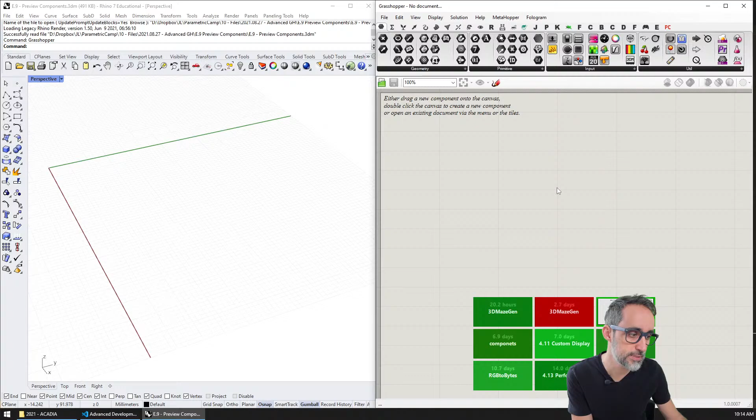Describe the data structure in Grasshopper, how to output data trees, and then for that, replicate an example. Which example could we replicate? Let me fire up Rhino, preview components. I wonder which of the ones we have, a grid of points. Could that be interesting? Do we have a grid of points? Utility components, vector components, construct vector, point grid. Okay, yes. So this one, because we use data trees here.

And then we use that, and then NURBS, divide the surface. This maybe is a little too long. Data components we can get. So we can do how to output data trees with an example of a point grid, and how to input them, with an example of, maybe, tree info. I'll take a look at that.

I think that's pretty straightforward. I'm not sure that we need to do examples or a video here. It's not really that difficult or that different. Okay, custom previews. So let's start with that. Mass addition is going to be in arithmetic, or numerical sequences, or utility components. I think we're going to do that in utility components.

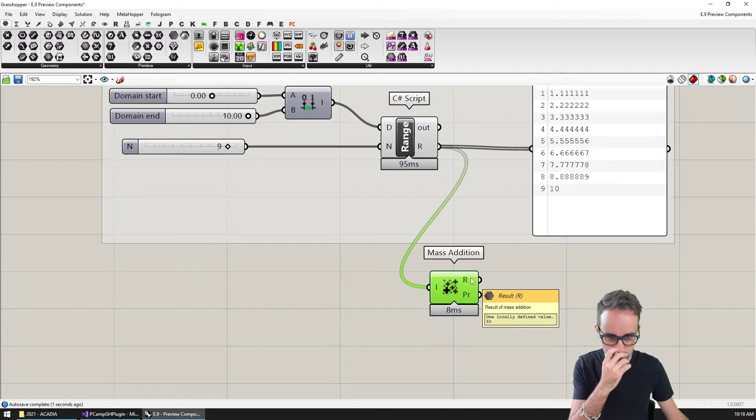So maybe I can talk about mass addition, the partial results here. Alrighty. Mass addition. What was the last video that we did? Icons and our first components. Okay. All right. So let me start here then.

Hello, this is Jose Luis here at ParametricCamp, and welcome to another video in this series, Advanced Development in Grasshopper, where we're going to take a closer look at how to manage data structures when we are developing native plugins for the Grasshopper environment.

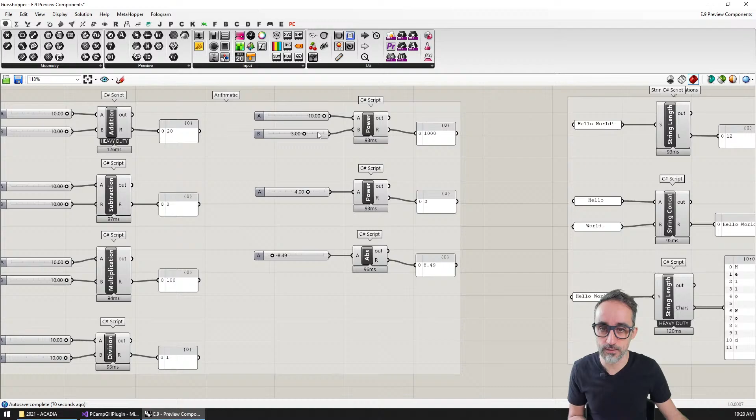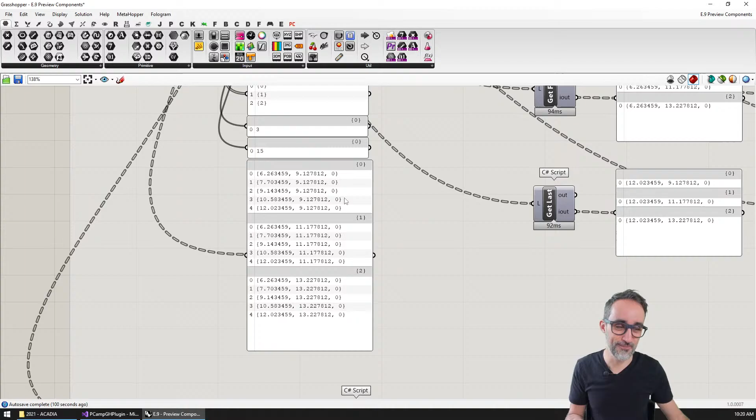And what do I mean by data structure? So if you are familiar with the Grasshopper environment, you may already know that we can work with individual points of data, like for example, adding two numbers and getting another number as a result. But we can also create sequences of numbers that are stored in data structures that are referred to typically as lists. But Grasshopper, on top of that, has a particular data structure that is called the data tree, which is basically a combination of multiple lists that have a certain order and a certain structure within a larger superstructure, if you will. We've talked about this structure previously in previous videos.

And we've also seen in previous videos how to do lists and how to create data trees inside of Grasshopper using C# scripting. In this video, and I'm actually going to point to a card that will be popping here somewhere in the corner, and it will be in the description of this video where you can find more information about that.

What I would like to cover in this video is how to, in native development, work with lists of data as inputs and as outputs, and at the same time how to handle data trees natively in Grasshopper in development, because when we develop native plugins, data tree structures are slightly different. Okay, so examples of this are, for example, if I take a list of numbers and I input that list of numbers, then I can take the whole list and make operations that look at the full list altogether.

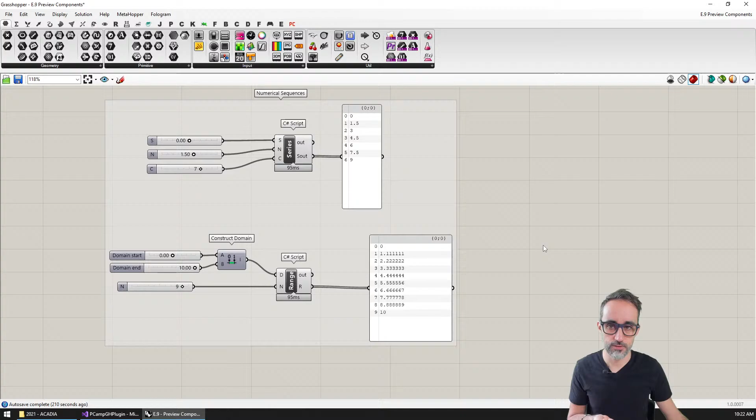And I'm not liking where this is going. I think I'm going to start over again. I was not liking that. So I think I went too much into what data lists are and data trees are. And that was unnecessary, because if someone is watching this video, it's already from the playlist and they already know what lists and data trees are. Okay. And maybe I don't need to explain. Maybe I don't need to get much into this. All right. Okay, let's try again.

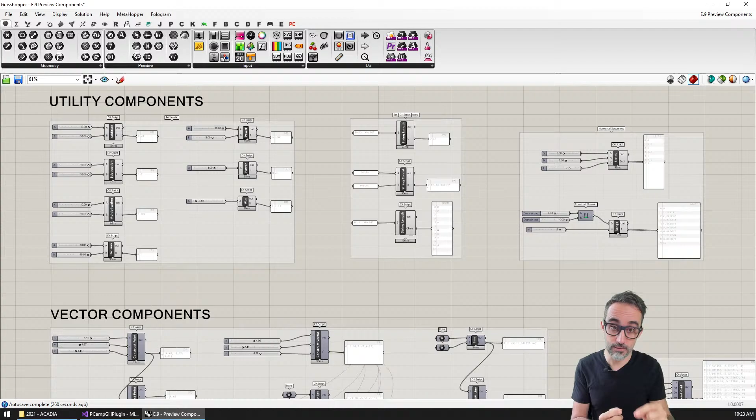Because as you already know from previous videos, Grasshopper allows you to work with individual points of data. So for example, you can right click here and say I want item access, so one element at a time, or you can work with lists as an input so that you can take a look at the full list of elements that are coming in.

But also, as you already know as well, Grasshopper has this particular data structure called data trees, which is basically a collection of lists within other lists and with some additional metadata such as the name of the branch that those lists are contained in. This is very handy for many operations, and we have seen in previous videos how to, using C# scripting, work with lists and with data trees.

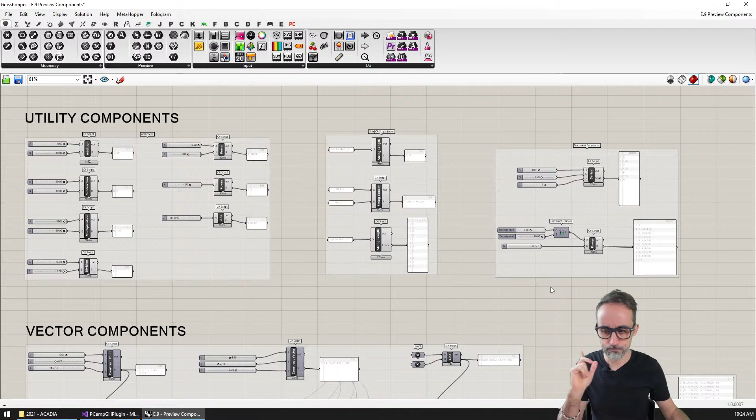So in this video, I would like to take a look at how to handle lists and how to handle data trees, especially because data trees are a little different than what they are when we do C# scripting. Okay, so for example, in the previous examples, like when we were developing the divide curve component, you could see that in order to output, instead of one item at a time, a list of items, it was just as simple as changing the access parameter of the outputs that we had here. All right, it was just as simple as that.

And then keeping in mind that the only thing that we need to change in our solve instance is that in the DA element, so in the data access element, instead of using the SetData method, use SetDataList for the output. Okay, so what we're going to do in this video is we're going to take a look at how to take a list of data as an input, and then we're going to do an example of that, and we're going to move on to data trees.

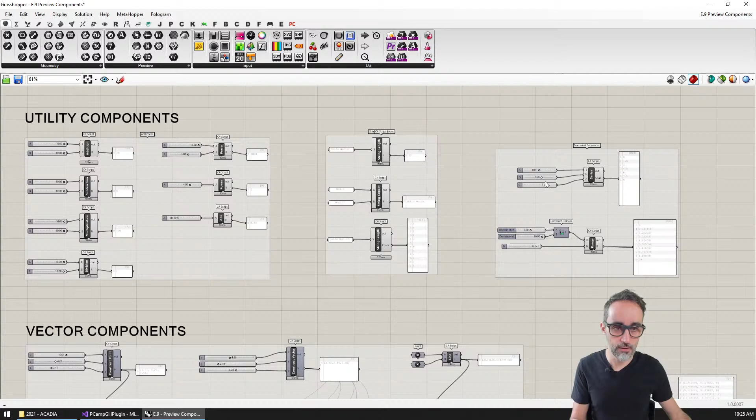So let me show you an example of how to take lists as an input and work with those. I think what we're going to do is an example where we're going to replicate the mass addition component. The mass addition component is a component that takes a list of numbers and then adds them all together, creating the result of all the numbers together. And then it also gives you partial results of those additions. Okay? So let's take a look. Let's write the basics of a mass addition component natively.

Okay, and then what we're going to do now is, how am I doing battery-wise? So what we're going to do now is, okay, mass addition.

As we've done before, I'm going to go to utility components and add a new item that is going to be a subset of the template empty grasshopper, and I'm going to call this mass addition component. The nickname is going to be mass add, the name is mass addition without the component, and the description adds a list of numbers. The category is going to be utilities, correct? No, the category was PCamp and the subcategory was utilities.

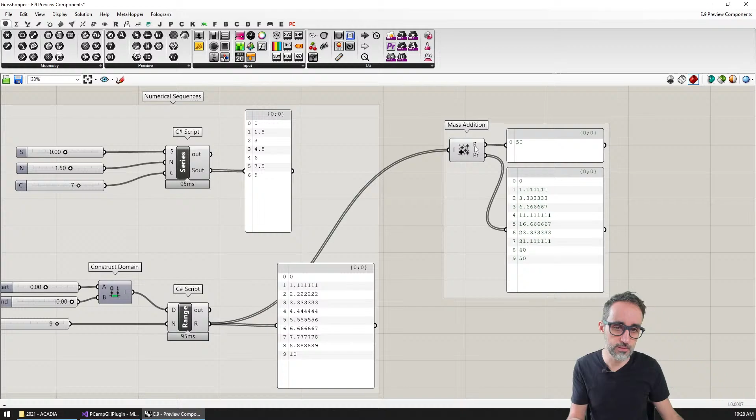And then the two outputs are going to be R, the result, and PR, the partial results. So I'm going to say P manager add number parameter, R, the result, with result as the description, and this is going to be an item, because from a list, when we add them all together, we just get one single number.

Then I'm going to copy and paste this, and say PR, partial, with partial results as the description. And this one, instead of an item, is going to be a list, because I'm going to have a list of numbers representing those partial results.

So managing input lists is just as simple as changing the access parameter, but remember, when we use this pattern where we predefine the variables that contain the input data and fetch it from the data access object, instead of being a curve or an integer, it will have to be a list of all those values. So here I'm going to define a list of doubles that I'm going to call values, and initialize to null, for example.

And then I would like to say if I did not get a data list, in this case we do not use get data, we use get data list. If I could not get data list in parameter 0 and pass it to values, then return. And I think the error I'm getting here is that I don't need the ref keyword because this is not a primitive value anymore; this is a list, which is a reference value. And that's it for taking the inputs.

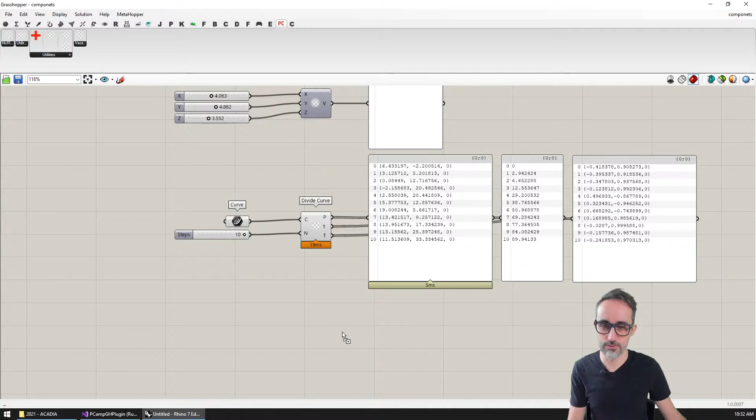And I am going to open Grasshopper, and I guess it was the components that I had. Yes, I had components here, and in PC I had utilities, and oh, it's not showing up. Why is it not showing up? Oh, I think I have the name wrong, for some reason. So, but let me just say mass addition. So for example, let me plug in here the series, all right?

And then you can see that value cannot be null. What is going on? Parameter list is a null reference. Get data list can only be called with a constructed list T. Interesting. It looks like maybe by doing null, it's not working. I cannot assign a list to a non-initialized list. I didn't know that, or I didn't remember. Utilities. Okay, so that was the typo of utilities.

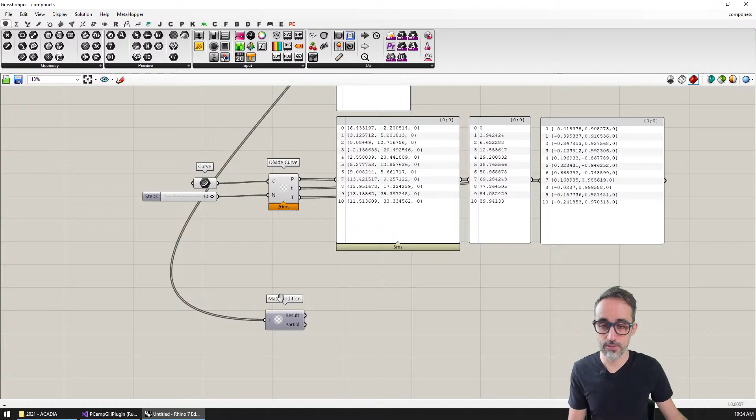So maybe then let me just initialize this to a new list that is empty, and let's see if that solves the problem. I'm going to initialize this. I'm going to open Grasshopper again, and then I'm going to open components, and then you can see that now this works. So as this is working right now, I'm going to copy partial here, and you can see the partial results, and then you can see the full result is here. So that would be 67.5, and this is the result.

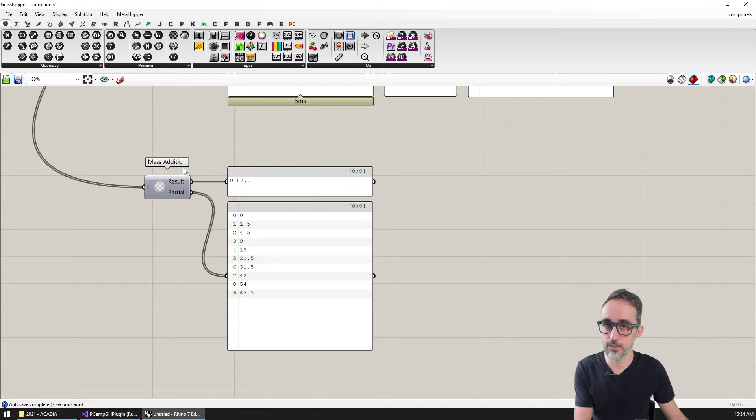And let me compare that with mass addition, and let's see if that is the same. So I'm going to plug that in here, and the result is 67.5, and the partial results look also the same. Okay, so it looks like we're good. And now utilities, add numbers, mass addition. So this is here. All right, so this is looking great so far. Beautiful.

So I think this is already good. So data lists, we know how to output data lists, and we know how to input data lists as well. It's just a matter of making sure that the inputs and the outputs have the right parameter access, and that we are working with native C# lists. We don't really have to do anything around this. So now let's take a look at how would we work with data trees instead of simple lists inside of native Grasshopper components.

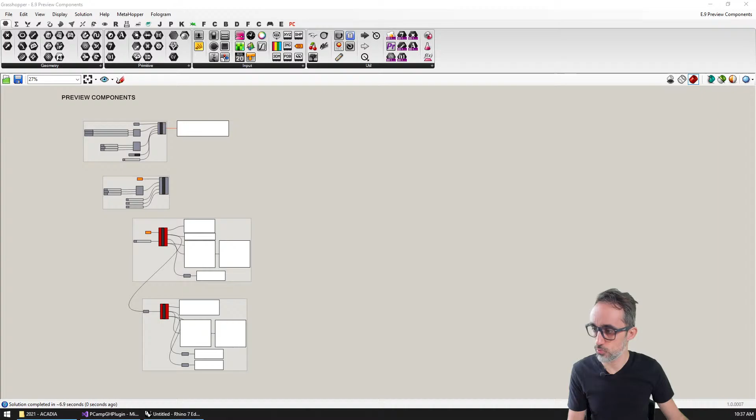Oh, this is breaking. Not good. Rhino just crashed on me. Okay, so let's try again. Okay, we're good now. And I would like to take a look at the point grids.

Point grid here. I'm going to keep that, and perhaps this is something that we could start the video with. So I'm going to take a look at point grid, and I'm going to say, remember, in C# script we have data trees.

I don't really know why we don't have that in the Grasshopper SDK. Let me double check, because I've always done it in a different way, but maybe I am being dumb. So do we have data tree? Data tree constructor. The data tree class implements basic Grasshopper data in an easy to use class. It's used primarily in a scripting component. If you're using the SDK, you should consider otherwise.

All right, so I guess this is. So I guess I was doing it right. So I was not using data trees. Which actually, it's a pretty good point to bring up as I'm talking through this problem. Exactly, I know, Victor. That's what I would like. I'm gonna make a video about that, I think.

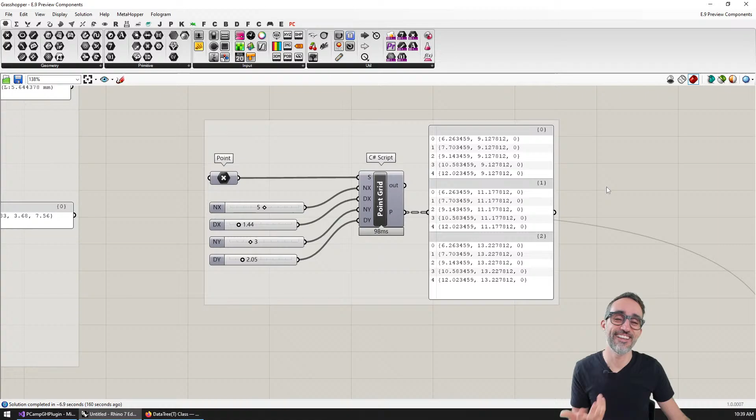If you remember from our previous videos, data tree structures are this particular structure for data that Grasshopper has, whereby you can have a structure that contains multiple lists in an ordered way, with additional metadata in the form of branches giving basically names to each one of the lists. We have previous videos for that, so we're not going to get into that again.

But if you remember, the way we did this when we were doing C# scripting is by using the class called the data tree, that allowed you to specify the type of data the data tree was going to be holding. It had specific methods for adding data to particular paths or branches. So this method using the data tree class is very similar to what we're going to do inside of native Grasshopper components.

But we're not going to be using data tree, because the data tree class was actually designed primarily for scripting components. If you look at the Grasshopper documentation, the SDK, it implements basic Grasshopper data tree functionality, easy to use, mostly for scripting components. But if you're using the Grasshopper SDK, which is writing native plugins, you should consider instead using the GH structure class. If you go to the GH structure, it's basically the same thing, just with many more methods and much more functionality.

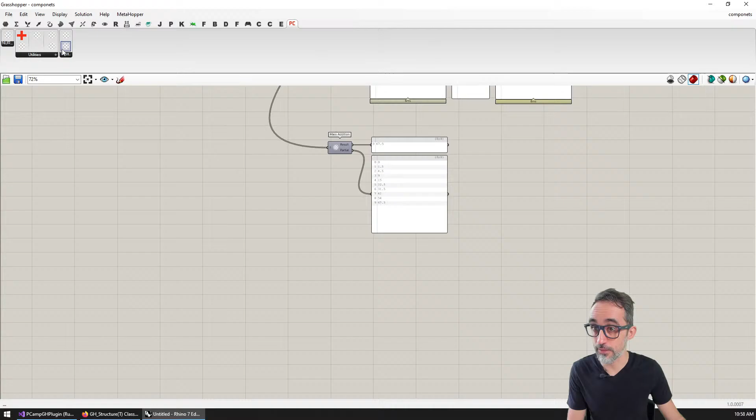Okay, my Grasshopper went to the other screen, and now under vectors I have the point grid. Let me open the other file—I'm just going to copy literally the data from the other component.

Oh, and it crashed. I've been having this problem before where when I'm developing, I can't really open other files. That's kind of sad. So let's just replicate it manually. Give me a second.

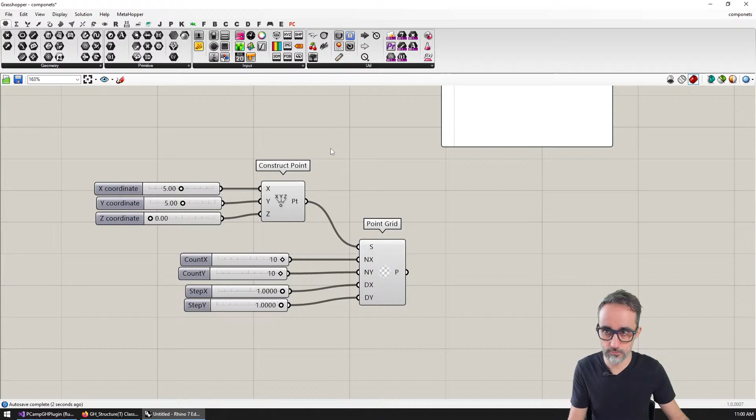Okay, so here I'm going to construct a point, and this is going to be... I'm going to do this, and then this, and then this, and then 0, this 5, and this is going to be 0. That's going to be the starting point, and the amount of elements in one direction is going to be 10, the amount in the other direction is going to be 10, and the gap size is going to be something, for example here and here. And I'm going to turn this off, and turn this off again.

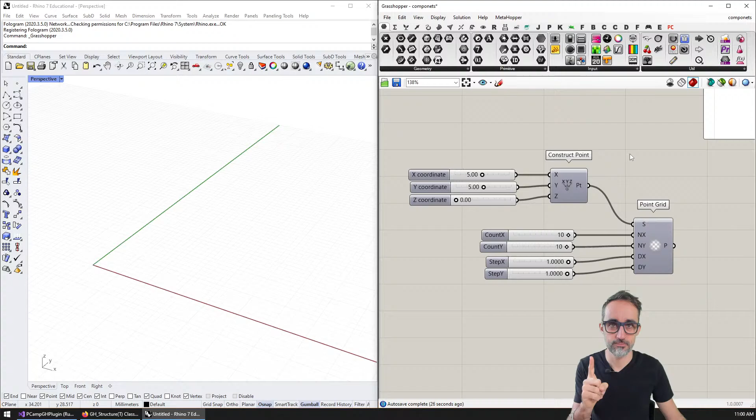Beautiful, so here we are. This is the point grid component we just developed. I plugged in a point, and I plugged in a bunch of numbers to control how many elements in one direction or the other. It looks like, if I turn the pre-visualization on, this is working. I can control the direction and the gap in each one of the directions.

But most importantly, is this a data tree? Beautifully, what you can see is that what I'm getting out of this component now is this list of lists, where for example I have 10 lists of 2 points each, structured as a data tree with different branches, etc. Okay, beautiful, that was it. So this is basically all you need to know about working with data trees inside of native components. You can create empty data trees like this.

You have to make sure that you wrap the data inside of proper Grasshopper types, and you just have to output it with the SetDataTree method, and make sure that the output has the correct parameter access as the tree.

Okay, and similarly, if we wanted to work with data trees that come into the component, it would be very similar. So let's take a look at a quick example of how to do that.

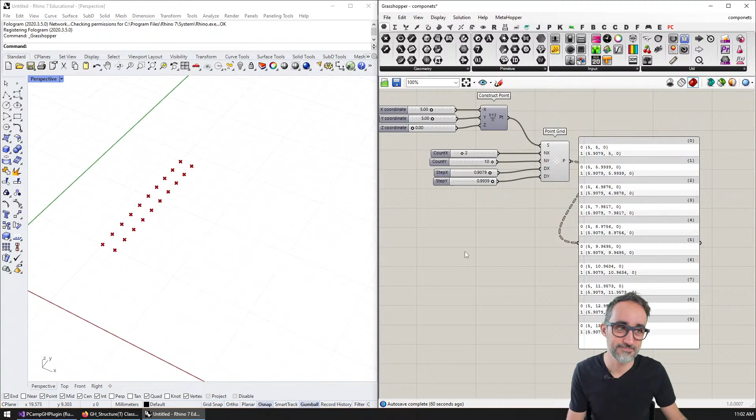I'm going to do that offline. If this doesn't crash, which it did. Okay.

And... I'm going to do it offline. Ooh, you don't wrap them, Victor. You just use objects.

Or you create your own custom IGH_Goo - you create your own sub-extensions of the Grasshopper data types using the IGH_Goo interface and wrapping your own data. You do that here, with IGH_Goo.

So, this interface - no wait, this interface - so you create a data type of your own. So for example, Grasshopper_MyDataType, and that data type must implement the interface IGH_Goo.

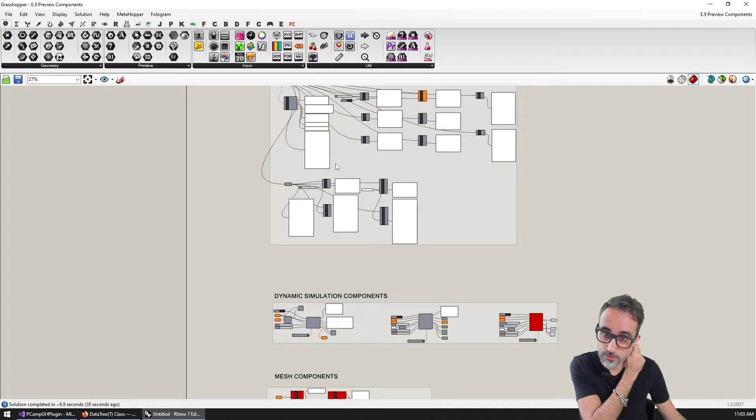And data tree - where were we? Preview. I was going to do this one, the tree info. So I'm going to copy this, and I wonder if we have access to all that information. So let me try that.

I'm going to do this offline, data components. I'm going to create here - I'm going to add a folder and I'm going to call it DataComps, tree info component, and I'm going to add a new one that is going to be TreeInfoComponent.

So we may actually want to make a video about that, Victor. That's a good point. I'm going to write this here somewhere - to do: implementing our own data types using IGH_Goo, I guess. That's advanced actually. I wonder if we can do that when we do external libraries.

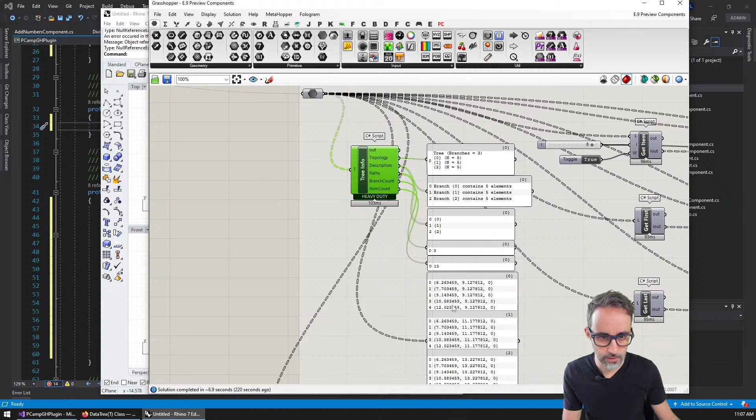Alright, so pManager, I'm going to add a string - AddTextParameter. That's going to be topology, and it's going to be top, for example tree topology, and then data access Tree.

Okay, so what else? We have description - pManager AddTextParameter, then description, that's going to be the description. This is what's bad about - oh, this is not tree, sorry, this is just an item actually. And description is going to be the type.

This is what's bad about developing Grasshopper - it's just very tedious, you have to write a lot. If you want to do a good job documenting everything, having text, highlights, all this stuff, it's kind of a lot.

So pManager dot - I wonder, are there AddPathParameters? Add a data path parameter to the output list, yes. So that's going to be paths, that's going to be p, paths, and then Grasshopper - this is going to be a list.

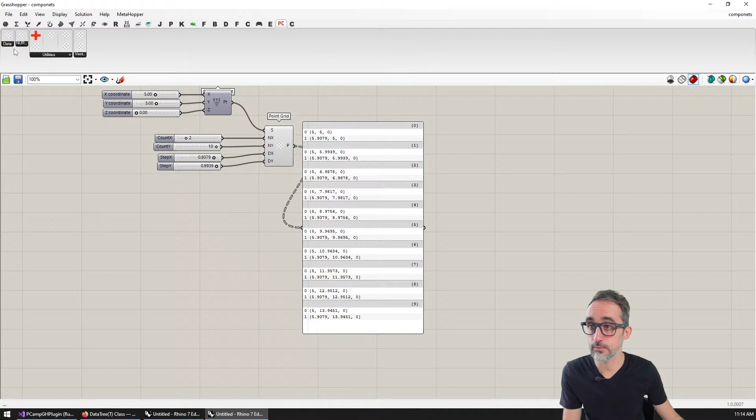And let's see if this works at all. So I'm going to... oh no, that's not what I wanted to do. That's not what I wanted to do. Okay, sorry. Maybe it's just that one file that doesn't load while we are on development mode for some reason. Components, all right, and then here we have Tree info, topology, empty data, what? Branch count 0. Why is this not working? Uh-oh. All right, folks, something is wrong. Topology, empty data.

I wonder what is going on. Am I not? Oh, I am not loading. All right, I did not load. That was very smart. Look at what happened. I just didn't load: if da.GetData from 0 and put it inside of t, then return. I was just not loading the data. And I got an error. This has to be okay. All right. Very smart, Jose. Very smart.

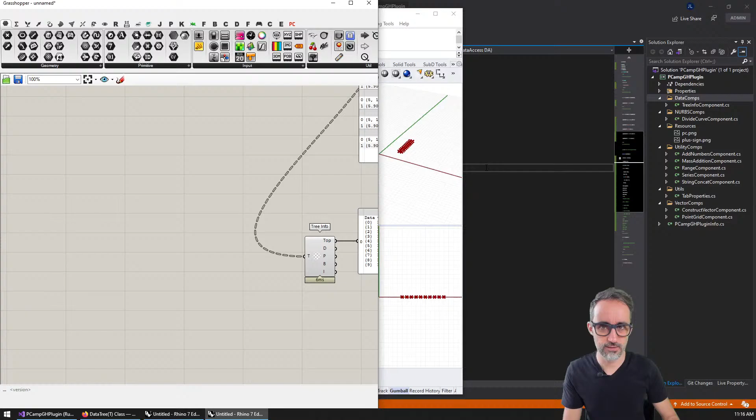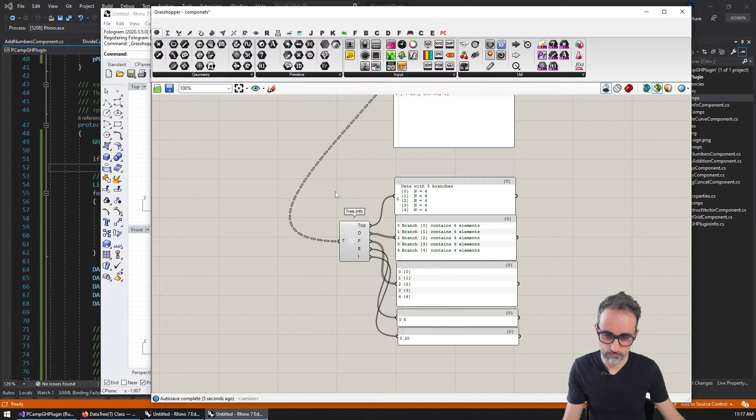Yeah, and why are the tabs not... Oh, okay. Description. Okay, four elements. Okay, so I'm going to show this and this, and the paths are blah blah blah, and then branches and the amount of items. Okay, beautiful. So I think I'm ready to explain this.

You can set build events so you don't have to load Rhino and Grasshopper every time using Grasshopper reload assemblies. How does that work? Grasshopper reload assemblies. I don't have Grasshopper reload assemblies. I think they discontinued that; that was available in Rhino 5 or Rhino 6 or something, but I think they stopped that in Rhino 7 because it was just too messy. Is that what you're talking about, Carl? I used to do that, but I think they discontinued that. Okay.

All right. So I'm going to take this here. I'm going to show the example of... I didn't start doing anything before, right? No, I didn't. It's still in there? Where is it? Grasshopper. Damn it, Grasshopper. Grasshopper. Reload assemblies.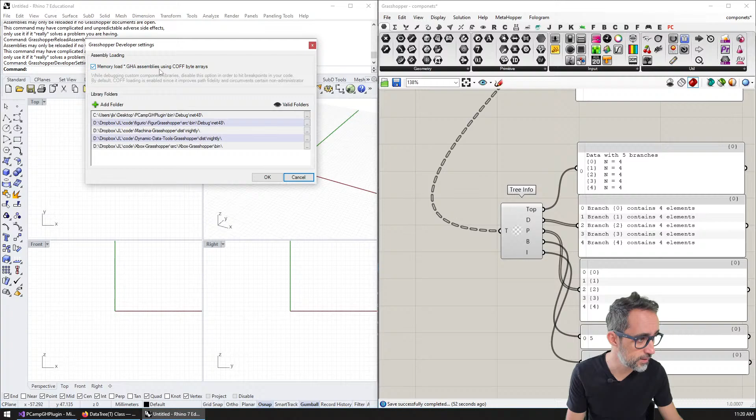So Grasshopper reload assemblies. It's really reloaded, and then I reload it, and I recompute it and it's not happening. Load Grasshopper developer settings, then ensure you've checked memory load. Grasshopper developer settings, I do have memory load. It won't autocomplete, just a shortcut, something like that. I can have a Grasshopper file open. Okay.

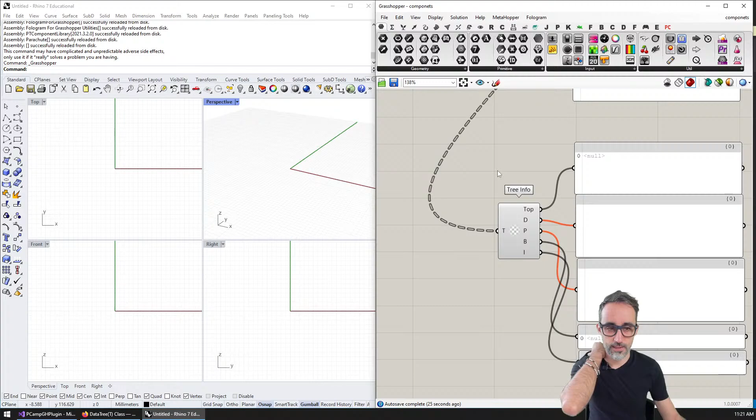I'm going to save this. I'm going to close Grasshopper. I'm going to Grasshopper developer settings, Grasshopper reload assemblies. It's there now. Components. You are right, it reloaded the thing. Interesting. I like it. That's quite good. Thank you, Carl. I did not know that thing was still there.

Okay, I wonder if this is something that we need to incorporate somewhere. I'll think about that, but maybe we can talk about that in the actual. I kind of think that for beginners, it's still better to have the whole turning it on and off, because at some point I also want to talk about the idea of launching Visual Studio and having it associated to Rhino so that we can do breakpoints and that kind of stuff. But yeah.

Well, make sure the bill is not too much. I'm not making a lot of money with these videos.

Yes, Tim, we will do the no splash thing, and we will do customizing our build events. I just thought that would be a good video to do. We may actually do this today.

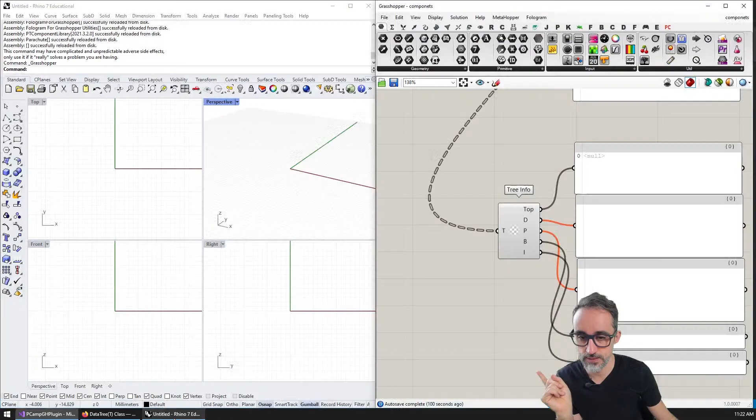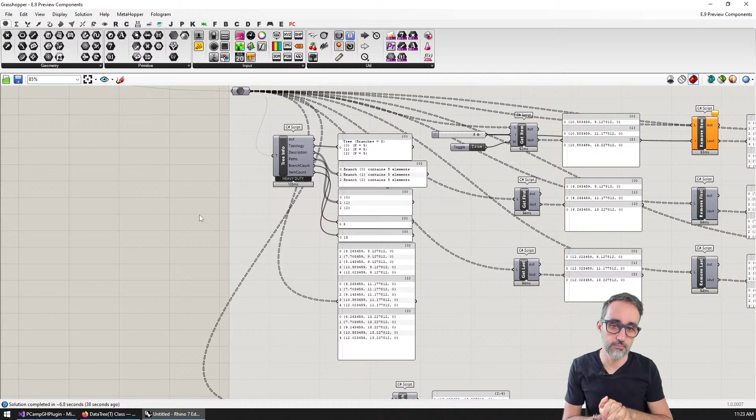Okay, so let's finish this video. So I said I would like to show the other file, preview components. I'm going to close this one, and I'm going to use preview components. So I'm going to talk that this is what we're going to replicate, then show that I have all the inputs, the path, etc., and that this is the algorithm, and then I'm basically going to do what I did before. Okay, all right.

So for instance, let's say that we wanted to replicate now the tree info component that we developed before. It's just a component that takes any tree, a generic tree. It doesn't have to have a type, because it's just going to fetch metadata from that tree. It goes through the branches and creates some sentences, so that it can output information about the topology of the tree, how many branches contain how many elements, the paths, how many branches the tree has and how many items are in total.

So what I've done is I've gone offline and started this. I created a data components folder, and inside of it a Grasshopper component called tree info. I added the metadata, and what's interesting is that for the input, I did take an input with parameter access tree, so that I can get the full tree with all the information.

But in this case, instead of adding a point, a number, a curve, whatever, I use this generic input, which means that we don't really care about the type of what's coming in. We care that what is coming in has the structure of a tree. Generic is the type that we use for things that may have any type, and we in the solver will be the ones who handle which type that is, if we actually care about that.

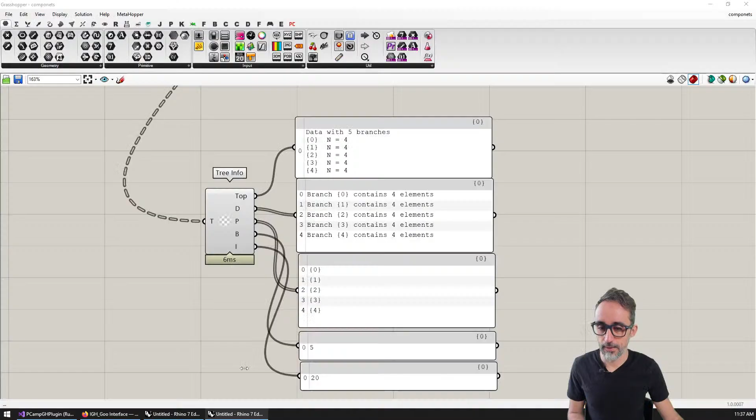Yeah, I don't think we're gonna have time to do auto updates today. So I think I'm just going to do 2 more videos, which are hopefully gonna be short. One is gonna be error handling, and the other one is going to be how to click here, start, and then have the thing open Grasshopper right away, and then open a particular file that we're working with in Grasshopper. Yep. Auto start.

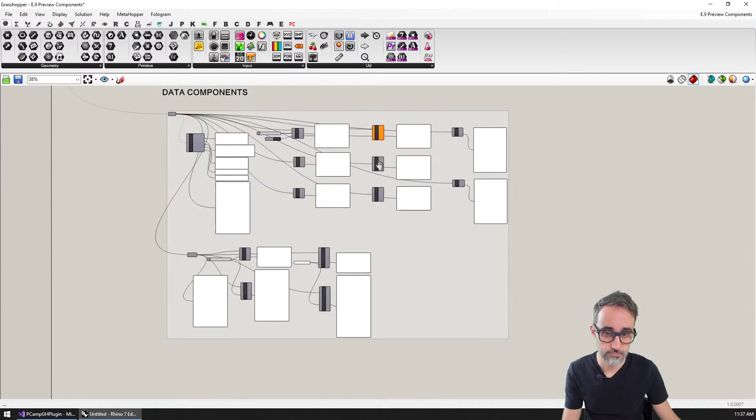Okay, and then for error handling, how can I do error handling? So what is a good example of error handling? Index out of bounds. Remove first. Where do we have any? Do you remember any component where we had both a warning and an error? I don't remember. Probably in get branch. Warning, index out of bounds. Warning, this is a lot. Index out of bounds.

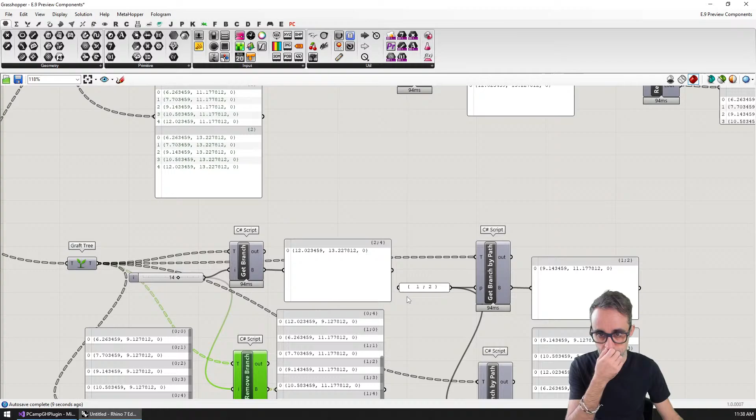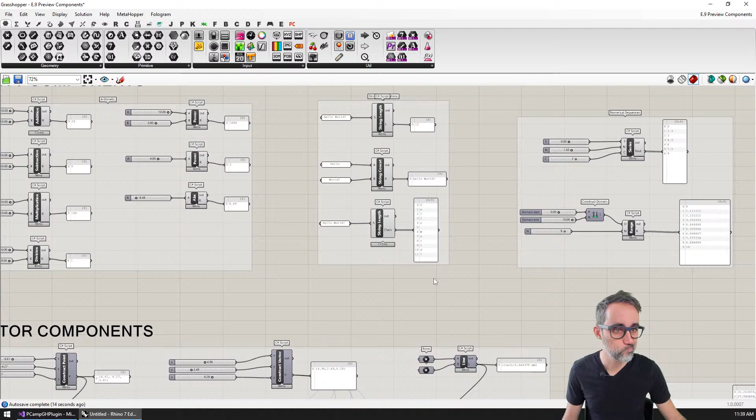Well, maybe we can do something where instead of just stopping using return, what we do is we throw an error message or a warning saying, hey, we didn't get enough data, just using 0 as a default. Or something like that. That could work. Divide by 0. Huh? That could be 2. I just want to find a component that we've used already for that. What could be something with a default value from the examples that we've seen so far?

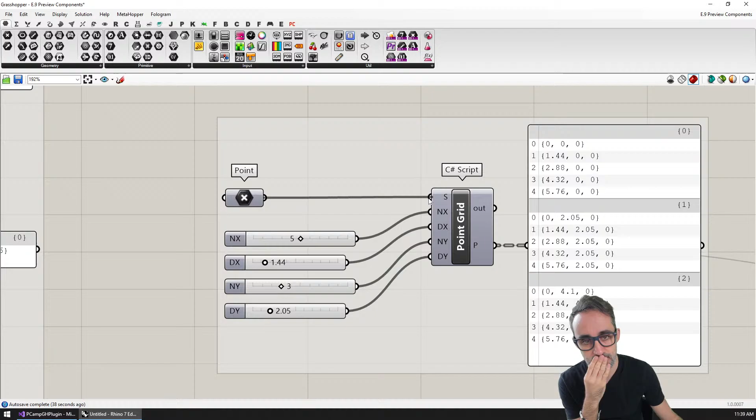So, because if I disconnect this, okay, it uses 0, 0. Because that's point grid. But what if I were to load components? What if I disconnect this one? It gets an error, input parameter failed to collect data. Oh, but then I'm going to get into optional parameters or not. That's going to be a lot.

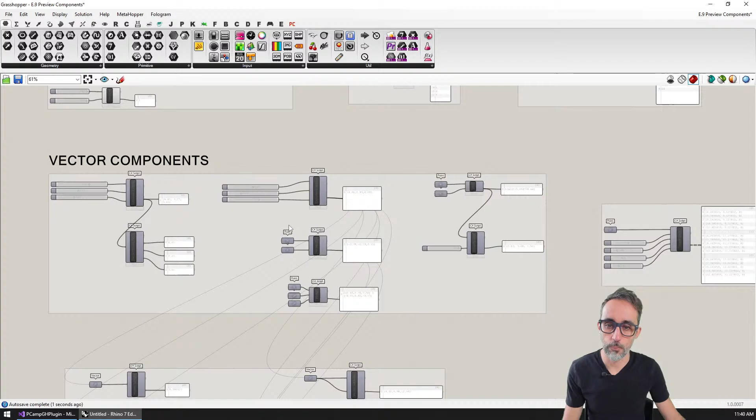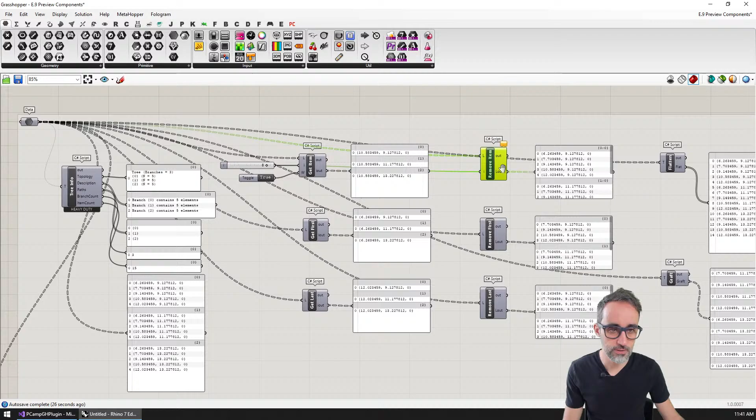I don't know. Which one should we use? I just want it to be simple and clean and lean. I don't want to get very complicated. Well, maybe this one, remove item. Yeah. You could just set defaults right in the pManager inputs in the end. I know, yeah. Which I haven't covered actually. I think, yeah, we haven't covered that in the videos actually. You might have a good point, Tim.

Okay, because what if I don't do this? Let's say I don't do this and I run the plugin and I don't pass info to the component. Fine. And then if I do that and I disconnect, it failed to collect data anyway, so it stops executing anyway because it doesn't have a default.

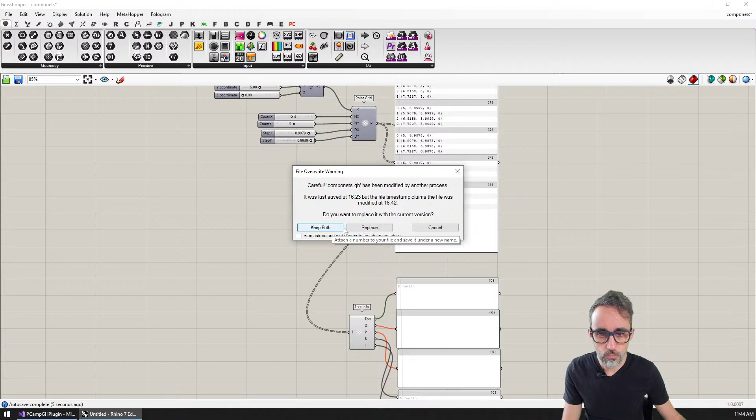Okay, so let's do that. Let's do that. Okay. Yeah, I think that's a good idea. Okay. All right. So then this is going to be called error handling. So let me try what I'm thinking of doing instead of just in case. So let's add some defaults here.

And then let's say if DA dot get data or this thing. Oh my god, I'm a little clumsy right now. If none of this, then this dot add runtime message, runtime message warning, using default inputs. Okay, and if I run this,

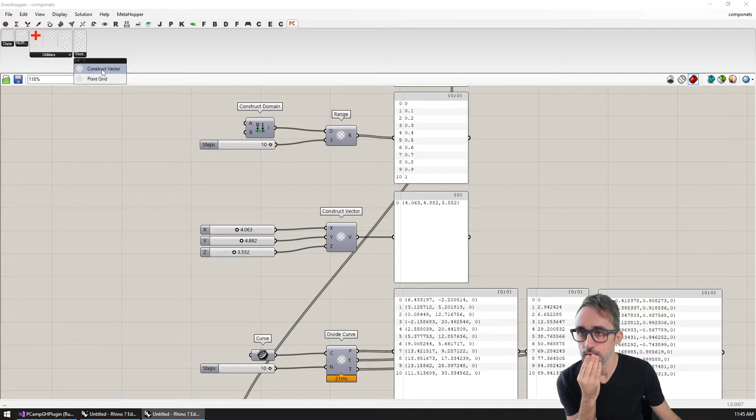and then I do components, and then I drop a vector. I am not getting any error because I am passing in default parameters, which are 0, 0, 0. So not a good example because I did get data as part of the defaults. So then why were we using this in the first place? I forget it. So not a good example.

So maybe we can make a video on just this, you know? So maybe we just don't need any of this at all. Yeah. So by doing this and this and this, and I'm going to do this. Components and construct vector. Oh, but I didn't give it. Oh boy. Okay. Yes, I am clumsy at this point. Here. Oh, and now it broke again. Oh boy.

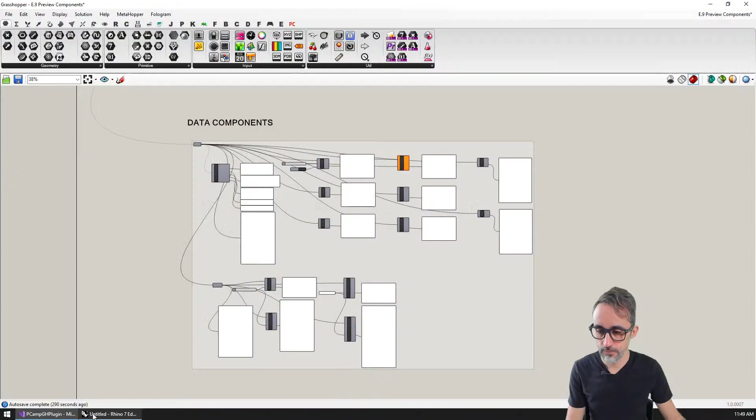So the way I'm going to do that is that I'm actually going to do the example again. Add new item. I'm just going to write it. Remove item component, and it's going to be inside of data, so remove item. Description: removes an item from a list. Yes, it's from a list. And then category is going to be pcamp.

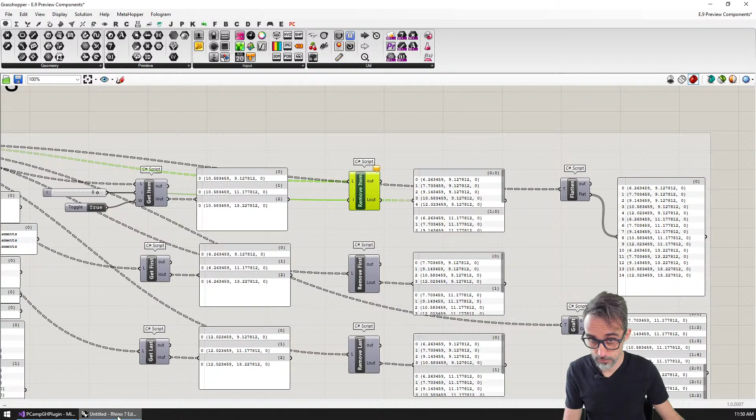And then this is going to be data. Register input parameters. pManager is going to be the list. Add generic parameter, list, L, list to remove from, type list. Then pManager add integer, index, lowercase I, index of element to remove, parameter access item. And then the output is going to be the same list.

Add generic parameter. The output was L out, clean list, and that's going to be a list. This is going to be a list of objects, L is a new list, and then if DA dot get data list from 0 into L, then return. Okay. And then if in the input get data, that's 1, and that's reference I. This dot add runtime message. Okay.

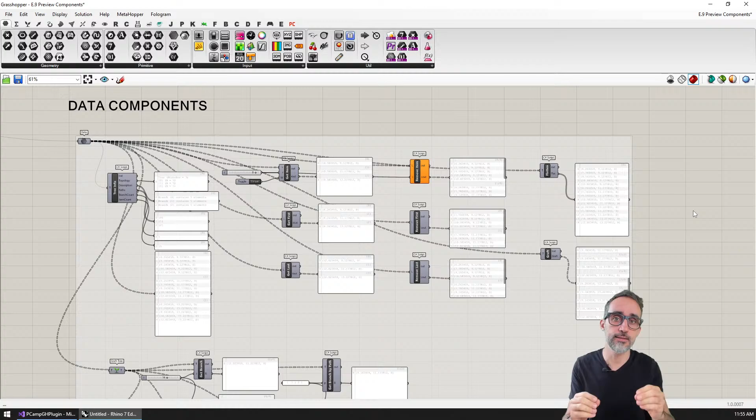Where I would like to teach you how to do error handling inside of a native Grasshopper component. So how does that look like? If you remember from the previous video on error handling, and a card should be popping up here, when we do this in C# scripting, we use the component property of C# script components to access the functionality of the component that we're living in, and we call add runtime message with all this other stuff.

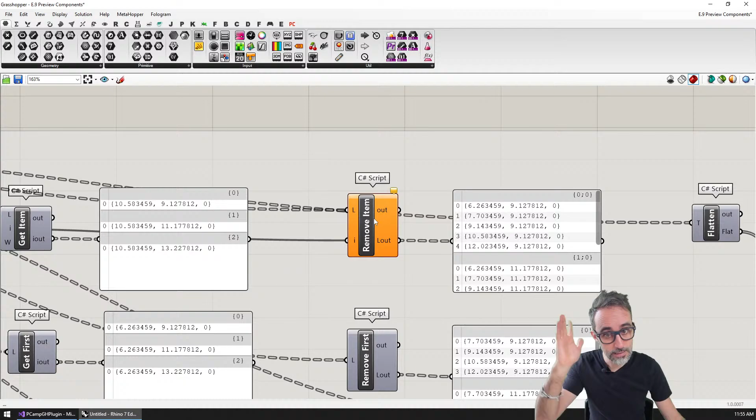And the method is going to be super similar if we do it natively. So what I'm going to do is replicate this remove item component that we did in previous examples, where we check if the index that we are given is out of bounds for the removal, and if it is, we display a message and we output a list that has had no changes on it. All right.

So I have gone ahead and done a test implementation of this where, in the data components, I have created a remove item component class. I fill in all the properties, the names, whatever. I created an input, the first one, which is a list. You can see it here, and it's generic because I don't care what type of data is going to come in through the list. And then the second input is going to be an integer, which is going to be just a single one. Okay, and the output is also going to be a list, with list as an access output, and it's also going to be generic because it's going to be the same type. It doesn't matter.

And in the SolveInstance, I have created the placeholder variables to take in the input data, and I'm retrieving the input data using the data access argument. All right, so we have that. And this is the original code that we have in the C# script component. So how are we going to do this? Well, it's going to be very easy. I'm going to adapt this code to the native Grasshopper way.

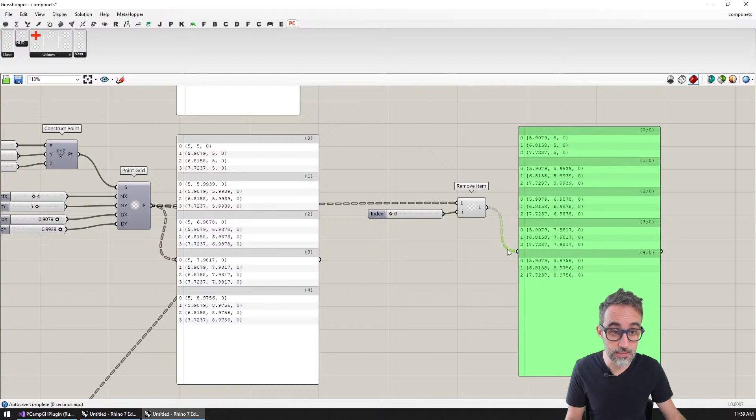So let's give this a try. Okay, I'm going to take components. I'm going to take this full data tree that I have here, go to data, remove item, and I'm going to remove the first item of the list. And you can see that because I chose list as an input, the component is executing once for each list.

So I'm with the first one, the second one, the third one, the fourth one, and now boom. At this point, number 4 is out of bounds, so I'm getting that error message. And anywhere after that, I still get the error message and the exact same output without any modifications. All right? So piece of cake. It's just finding where this method was inside of native Grasshopper components, which is really in the scope of the class that we are subclassing. If we were to go to Grasshopper components, maybe even here in the description, we might be able to find runtime. Runtime, is that somewhere here?

Okay, let me find it here. Yes, it is exactly here in the Grasshopper active object. So it's another class that we subclass as we subclass the component. All right, beautiful. So that was it.

Error handling in native Grasshopper components.

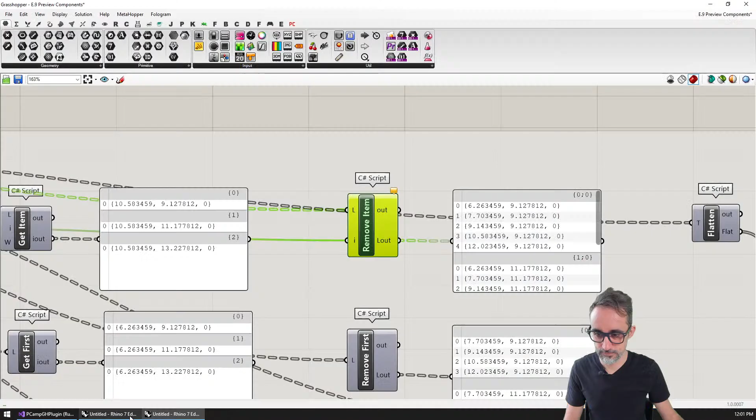All right, what is the next thing? Default parameters. So if I drop a vector... okay, next video.

Hello, this is Jose Luis here at Parametric Camp, and welcome to another video in this series, Advanced Development in Grasshopper. So what are we doing in this video? I'm going to teach you how to define default parameters for the inputs of components.

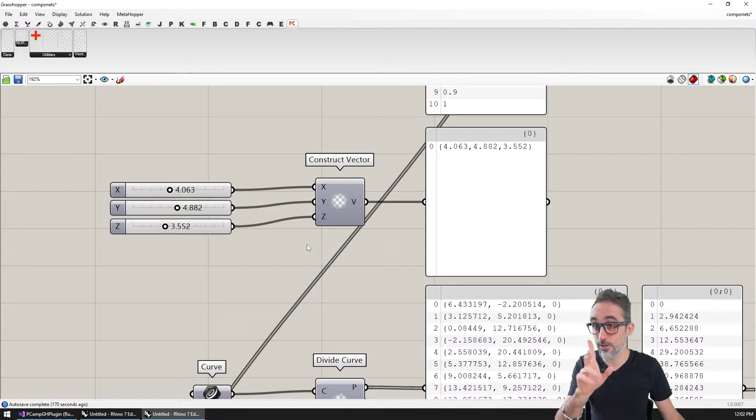What do I mean with this? If you remember when we created the construct vector component, we just defined that it can get x, y, z values, right? But we used the pattern that David Rutten recommends for taking inputs, which is if getting the data from the input failed, just stop executing the component. One consequence of that is if I drop a simple construct vector with no inputs, I get an error saying that X, Y, and Z failed to collect data, and I don't get any vector output whatsoever.

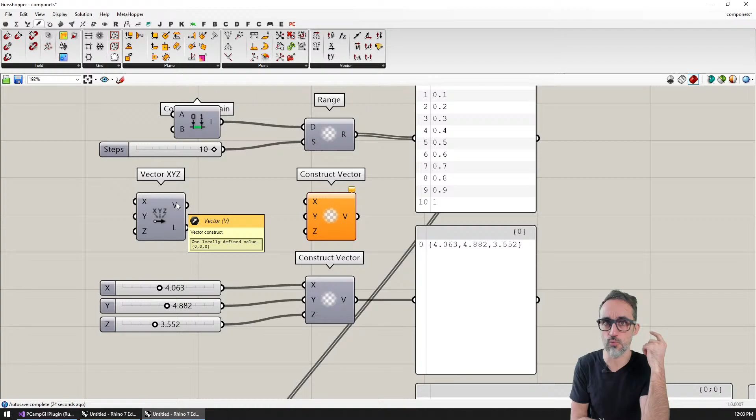Whereas if I go to the actual native construct vector and drop it here, you can see that without any inputs, for some reason there's already X, Y, and Z predefined values, and I already get a 0,0,0 vector, which is actually often very useful because very often we create 0 vectors or vectors with just one input like X, Y, or Z, and it's kind of tedious to have to add zeros all the time. So I would like to define a way to add default parameters out of the box for certain parameters, for certain components.

So let's do that with our construct vector component. First of all, let me try removing the pattern of 'if I didn't collect data, you have to fail.' I'm going to do this, add my semicolons here, and see what's going to happen. Let me show you, I'm going to do that right now.

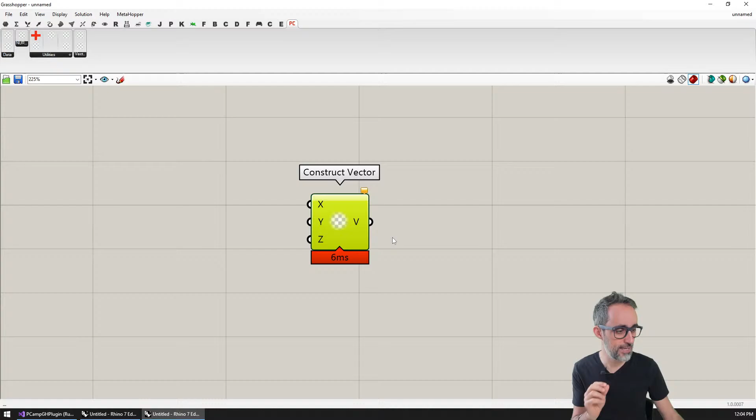What is going to happen is that I'm going to drop a construct vector here, and I still get that same error - fail X, fail Y, fail Z - even though I am not canceling anything here, and I actually do have default values for this variable, which is kind of weird. This is simply because Grasshopper is already managing stuff for us. Grasshopper, with the parameter manager and all the additional stuff that goes into making Grasshopper work, is already taking care of looking at your inputs, figuring out if there's any wire connected, and already gives you default errors for this.

So then how could I add these default parameters? Well, if you remember, when I was adding number parameter or integer parameter, the method I use actually has a bunch of different overloads. So if I go to manager.AddNumber, for example, and scroll through, the basic overload was name, nickname, description, and access.

If I scroll down through the overloads, you can see that the second overload comes with a default that I can add, and the third one comes with a list of default values in case the access is a list of elements. So what that means is that just by simply adding to the very end of the parameter the value that I want as the default, that is all I need to do here. So let me now show you this in action. I'm going to execute this.

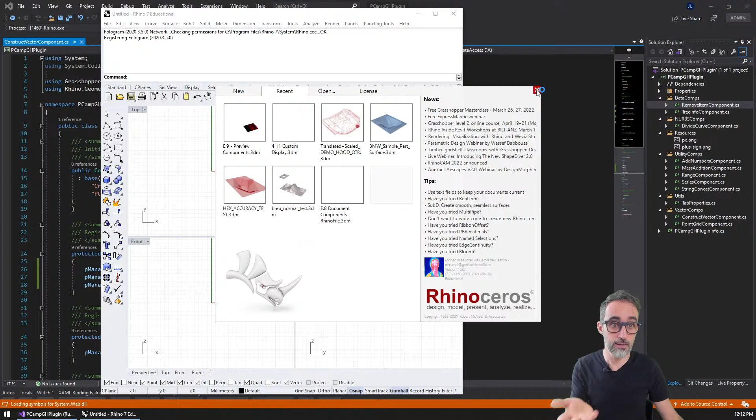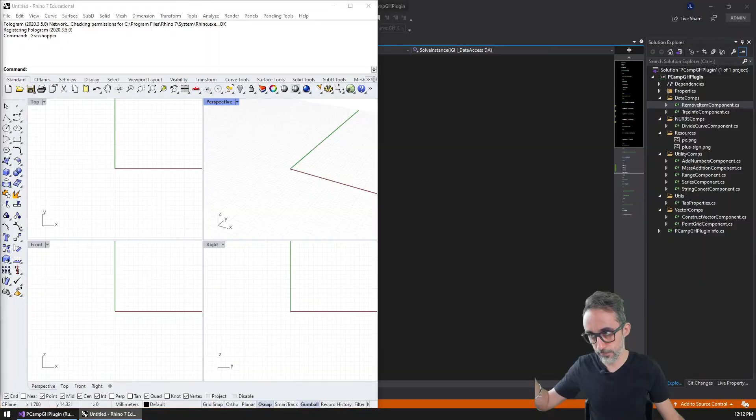And it opens Rhino in a way that we'll see in further videos, with all this code attached to it, so we'll be able to pause at a particular instance of the code and review it, etc. We're going to see that further down the road. But something that's becoming very tedious for me is that when I open Rhino and click play, Rhino opens up, but that's it. Then I have to manually come here and click on Grasshopper to open it, which on top of that opens on my other windows, so I have to bring it over here, and on top of that, I'm constantly using this one file.

I'm constantly using this one file called components, where I have all the stuff I'm using for developing. I have all these components that I'm kind of halfway through writing, which is a way that I work a lot myself. I typically have a Grasshopper file where I'm tinkering and messing things up, but that involves a lot of clicking. Every time I write code, I have to click and click and click. It's kind of not very nice.

So one way we can optimize this process is by doing the following. What I can do is configure my Visual Studio so that whenever I click run, it runs this project, opens Rhino, then opens Grasshopper, then opens a Grasshopper file, all at the same time. The way I'm going to do that is by hacking what's called the build events in the project.

So what do I mean by that? If I go to my actual project with a plugin, you can see I have several files in the root of the project. I'm going to open Visual Studio Code, not Visual Studio, because it's a little more lightweight, since I just want to read text files here. If you open the solution file inside Visual Studio Code or any text editor, you can see a lot of information about the project, the Visual Studio version you're using, the different modes you have, etc. So that's interesting.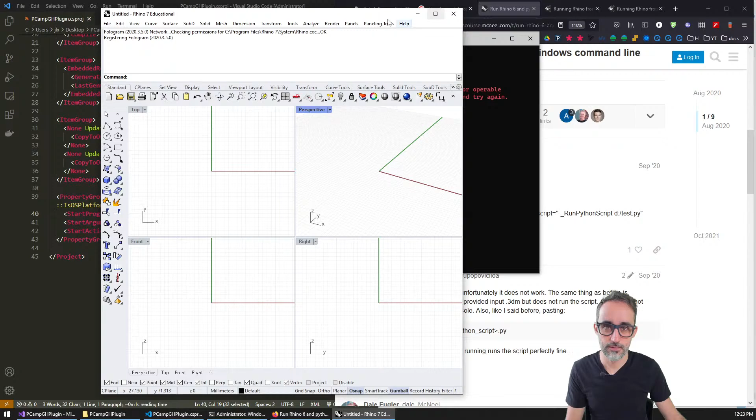Okay, so run script, okay, so let's say I type Grasshopper. Okay, that's not working. Hyphen Grasshopper, okay, also not working. Okay, can I just get the no splash? No splash, run script, Grasshopper. Hey Salvador, hi, how you doing? Okay, so this is not working. Grasshopper. And it's not adding it. What is going on?

Normally it's Tools, Options, General, command list. But I'm not getting it, so no splash. I actually have here that it should be something like this. It should be underscore and hyphen. But it's not, probably because it's not a... it's in Rhino, Tools, Options, General.

I'm not sure what you mean, Tim. But what I'm trying to do is something like this, you know, but just call a custom command here, basically. Maybe it's, oh, is it because I'm using... oh, damn it. I've gone through this before. Yeah, it's command, I need a command prompt.

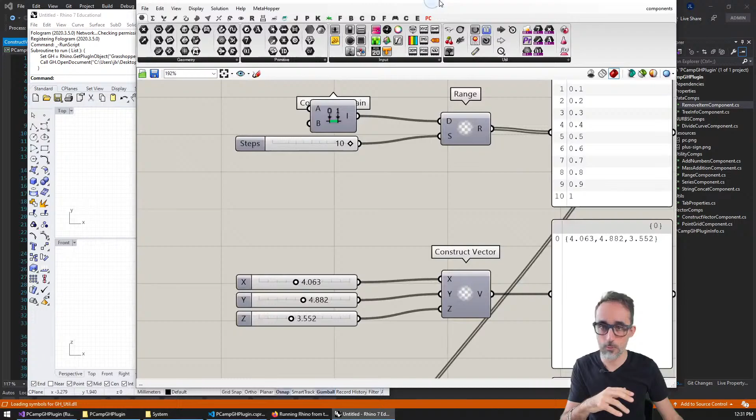I'm going to save this as part of my Grasshopper project properties. And then let me try running my Grasshopper plugin again. So what I expect now is that it's going to open an instance of Rhino. It does have the splash screen. I haven't removed that. But you can see this whole thing that just got triggered. You can see that Grasshopper just opened up, and without me touching anything, the components file that I was using also opened up right away.

Okay? So I find this technique very useful just because when I develop, I typically just do this all the time. I'm changing things, I want to hit play, and I want to land in this one file that I'm using as a bench, as a workbench, or as like some place where I'm testing code, I'm changing components, etc., etc. All right. So that's one way to speed up your development.

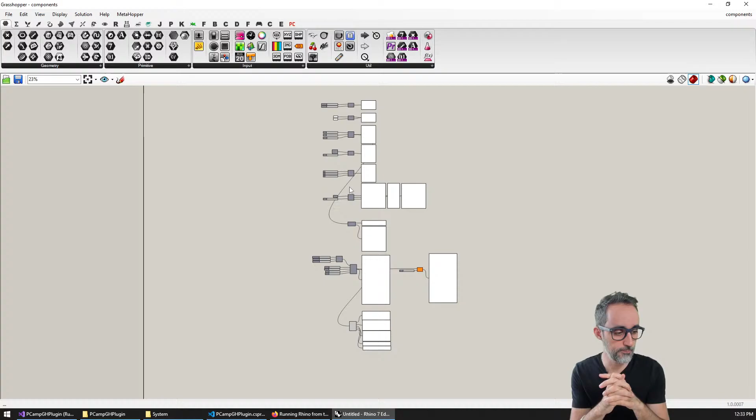I'm thinking about what I want to say now because I wanna bring in Timothy's suggestions of like reloading the assemblies without having to reload everything. I would like to do that. So I want to think about how to frame that and when to start the video and how to start the video. So that would be okay. All right, let me frame this. Oh, actually,

Oh, and I forgot to say, if you want to learn more about running Rhino from the command line, there's a documentation on the Rhino developer docs that gives you further command line options that you can input when you fire your Rhino from the command line. Okay, so you can learn more about how to do that here in the documentation.

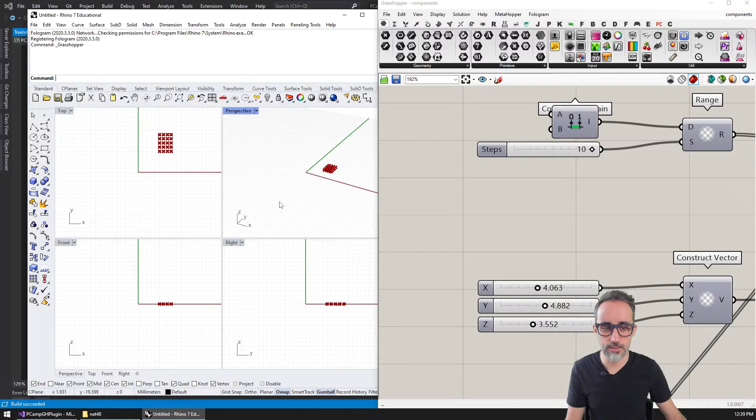And now I'm going to open an instance of Rhino that was not executed directly from Visual Studio. That is important because I want Rhino to be independent from Visual Studio and not have all the debug attachment, okay? So now I open the components file, and you can see that I have here my components, I have here my tree info, and my plugin has been loaded from my binaries file, okay?

So something that I could do theoretically right now would be, well, how about I just cancel all of this and I make the tree info component do absolutely nothing. I save this, and then I'm going to rebuild my solution, and then the files get reloaded, etc. You can see that everything succeeded, and that my files now have the timestamp of 12:40, which is the moment I just did this.

If I go to Rhino and I look at the file, the component is still working as it was. And if I recompute, the component is still working as it was. And if I add a new tree info component and plug in similar data, I still get all the data, even though I have deactivated that functionality from the plugin and built that into the code. So this plugin here already does not incorporate that code.

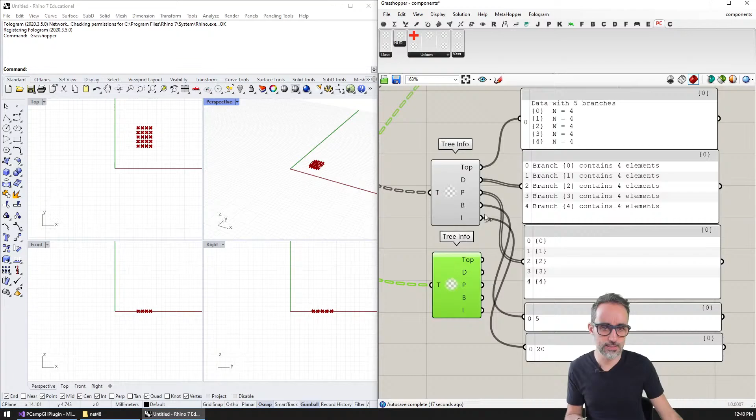Why is this happening? This is happening because when Rhino starts, Rhino loads all the plugins that it can find in the folders. It loads them in memory, and it only uses the versions that are stored in memory. So if the actual files change in the file system, like we build them again, or even if I delete them, this is still going to work fine, right? I'm going to undo that. It will still work fine because Rhino is working with files that it loaded in memory when it started. What that means is that any changes that I make while Rhino is open are not going to show in Rhino.

I would have to manually close Rhino and then open it up again. And as I open it up again, I'm going to open up Grasshopper again. I'm going to open the components file, and you can see that now that I have restarted everything, this component is doing nothing. All right, you see the problem?

So the problem is I need to restart Rhino every time I make changes because I need Rhino to load those changes at startup. Every time I make changes, I need to basically refresh and wipe the memory of Rhino. So how can we bypass that? Well, there is a small technique to do that, which I'm going to show you in a second.

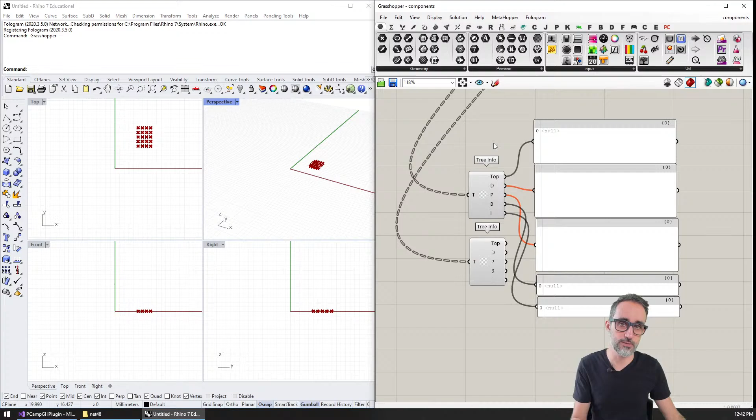So I'm going to close the Grasshopper file that I had. And remember that in that Grasshopper file, right now the algorithm doesn't do anything. So what I'm going to do is I'm going to activate again the functionality of tree info.

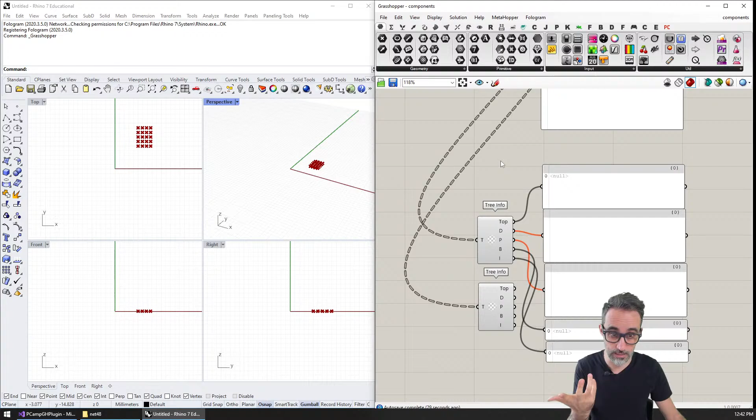Okay, I'm going to save this and I'm going to build the solution. The solution gets built, so now this file is updated. If I open the components file again, I still don't get that functionality because again, the Grasshopper plugin that is working in memory right now is the one that was loaded as Rhino started. So what I need to do now is somehow refresh the memory of Rhino regarding all the Grasshopper plugins. So I need to tell Rhino somehow, forget about all the plugins you loaded,

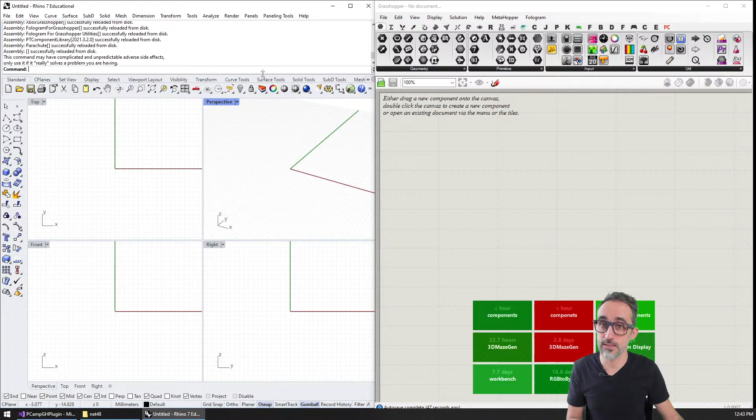and can you please load them again? And the way to do that is by using, in the command line in Rhino, this command that is called GrasshopperReloadAssemblies, which as you can see doesn't have an autocomplete. But as I press enter, you can see that all these components have been reloaded in memory: PTC, Booleans, triangulation, or pcamp Grasshopper plugin. This is the one that we were actually interested in. So Rhino went ahead, forgot everything that it knew about the plugins, and reloaded them again.

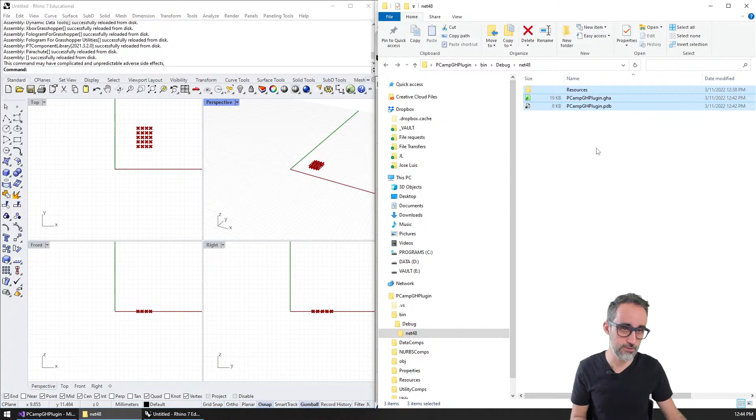If I go now to components and I load it again, you can see that the component now does have the updated functionality, because I have forced Rhino to take another look at the file that I just built and update the new functionality. Now, the downside is that this method is not very strongly recommended and actually is kind of discouraged by the author of Grasshopper, and that's why they removed it from the autocomplete. It's discouraged because messing with memory is a tricky operation. It can be dangerous, and it can also mess up other things down the road.

So it's up to you. If you want to use this method because you really are developing a lot of things really fast, just make sure that if you get errors or things start working unpredictably, you restart Rhino and do things over again. Also, this method will not allow you to connect a running instance of your plugin to Rhino so that you can do breakpoints and dynamic debugging, as we will see in further videos, because now Rhino is completely separate from Visual Studio. But still, it's a good technique to know.

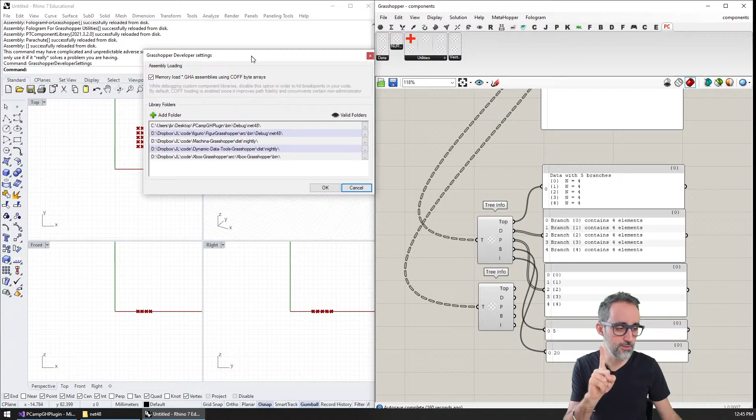I believe that in order for this to work, you have to type GrasshopperDeveloperSettings, and you need to make sure that this option, assembly loading, is checked. I believe so, but I'm not entirely sure. So if what you're doing doesn't work, make sure that this is also working for you. All right, beautiful. I hope this was useful. I hope you learned a couple techniques to make your development in Grasshopper with Rhino a little faster, and that you now can develop a lot of things really fast and very awesomely.

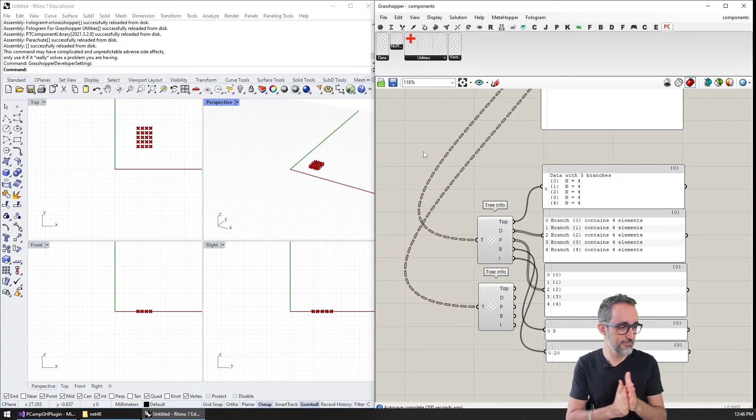Alrighty. And that's it for today. That was 4 videos. Timothy, thank you very much for the suggestion. I'm actually really happy about that, and I'm happy that we managed to introduce that into the main playlist. I really thought that that option was just gone.